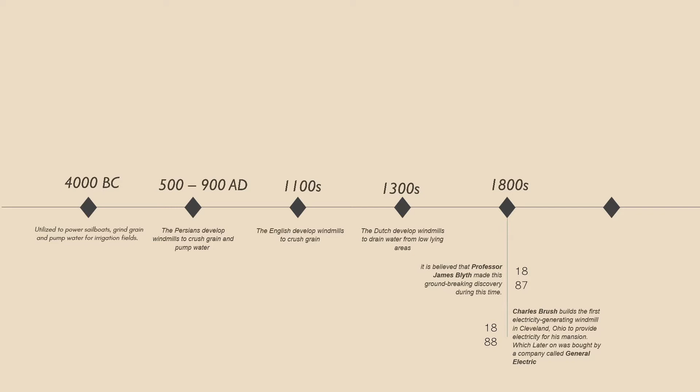Here comes the 1800s. During 1887, it is believed that Professor James Blyth made this groundbreaking discovery. After just one year, in 1888, Charles Brush built the first electricity generating windmill in Cleveland, Ohio, to provide electricity for his mansion, which later was bought by a company called General Electric.

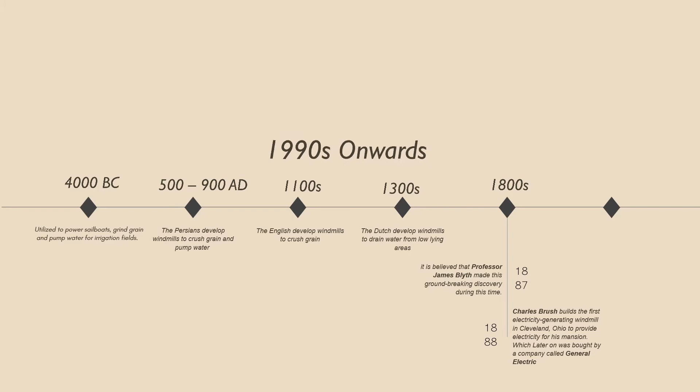In the 1990s and 2000s, the US federal government established incentives to use renewable energy sources in response to a renewed concern for the environment. Ever since, wind energy has been utilized mainly to generate electricity with the use of wind turbines, and the demand has been growing due to the decrease of supply in fossil fuels and its increase in price.

Wind power is one of the world's fastest growing energy sources. As of the end of 2017, the world's total wind energy capacity had climbed to 539 gigawatts, thanks to new installations around the world. If you would rank countries with the highest wind power capacity, China is the world's number one with a whopping wind power capacity of 188 gigawatts.

The United States comes second with a capacity of 89 gigawatts. Germany, India, and Spain follow this list.

Despite the fact that wind is free and renewable, it has its own disadvantages. The first disadvantage is that current wind turbines are expensive and they generate power only when the wind blows, making their output inherently unreliable. Furthermore, wind turbines must be located where the wind blows, which can be far from traditional power systems, necessitating the construction of new high voltage power lines.

Nonetheless, wind turbines are likely to play an ever-increasing role in global energy supply soon.

Now, let's go ahead and talk about wind turbine types. Wind turbine types are categorized according to the orientation of their axis of rotation. These types are horizontal axis turbines and vertical axis turbines.

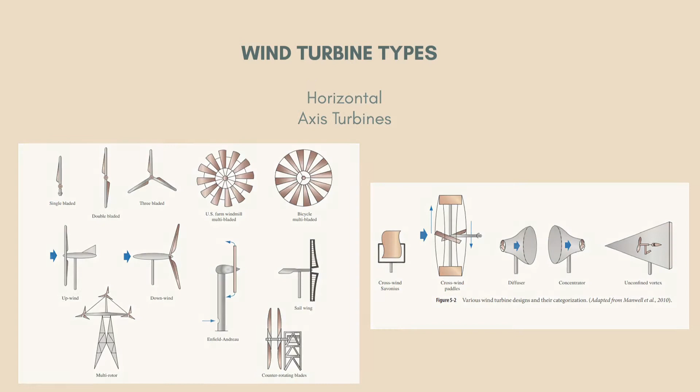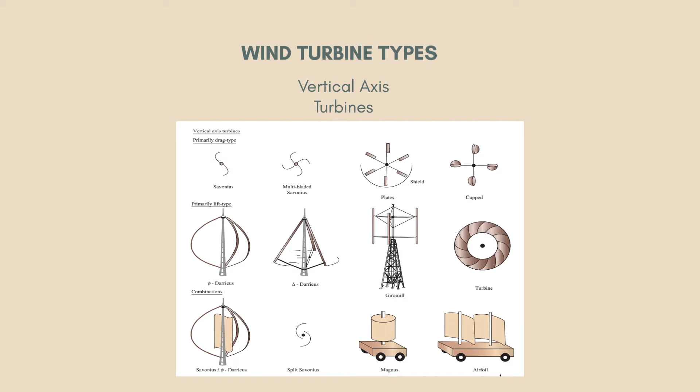For vertical axis turbines, it consists of four different main designs. These four designs are primarily drag type, primarily lift type, combinations, and others.

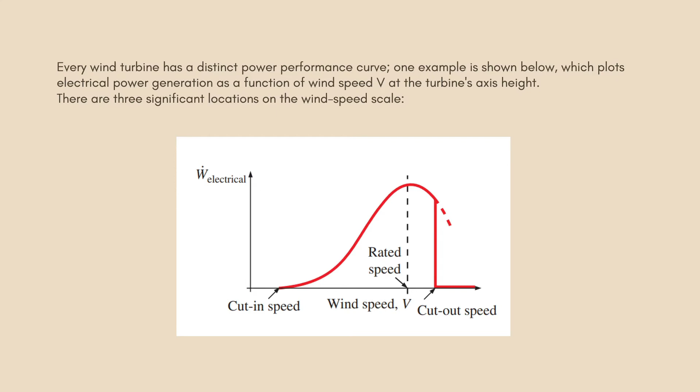Every wind turbine has a distinct power performance curve. One example is shown below, which plots electrical power generation as a function of wind speed V at the turbine's axis height. There are three significant locations on the wind speed scale.

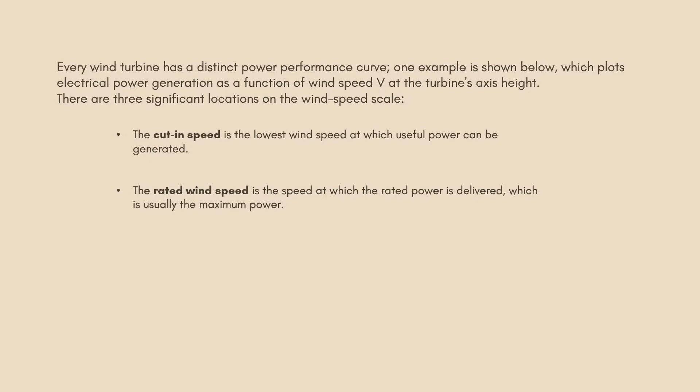First, the cut-in speed is the lowest speed at which useful power can be generated. The rated wind speed is the speed at which the rated power is delivered, which is usually the maximum power. The cutout speed is the maximum wind speed at which a wind turbine is designed to produce power.

At wind speeds greater than the cutout speed, the turbine blades are stopped by some type of braking system to avoid damage and for safety reasons.

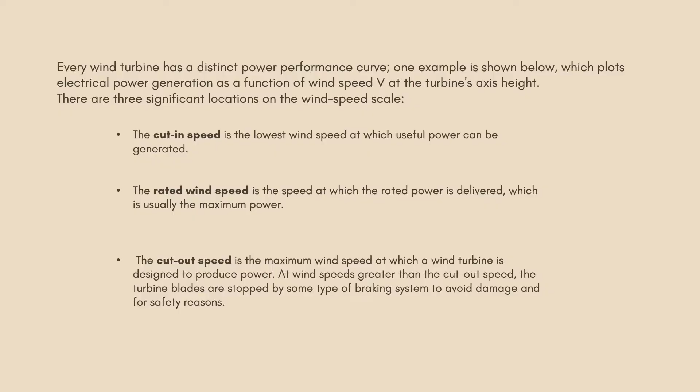Wind turbine efficiency: an actual wind turbine can convert only a percentage of available power potential into actual shaft power, and this percentage is called the wind turbine efficiency.

This is determined from the formula: wind turbine efficiency equals shaft power over available power.

The available power can also be expressed as the wind power potential formula, where it is one-half times density times wind area, times the cube of wind velocity.

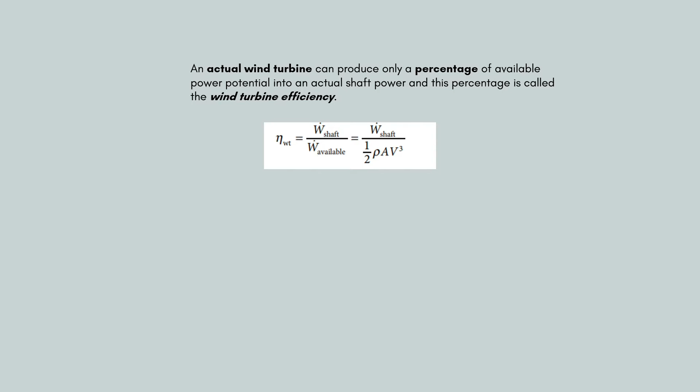Next, we can solve the electrical power output using the formula: electrical power equals gearbox or generator efficiency multiplied by shaft power. Here, the shaft power refers to rotor shaft power output.

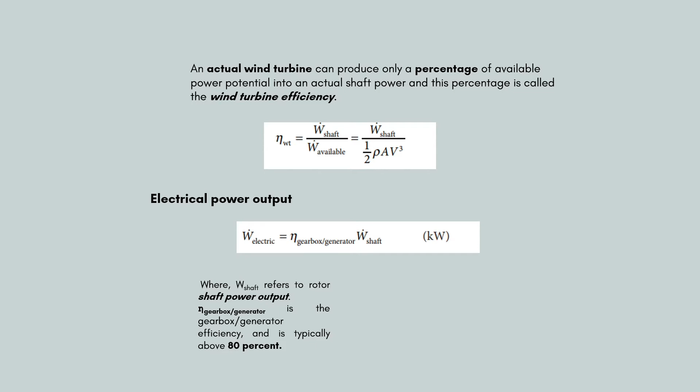A gearbox or generator connected to the turbine converts shaft power into electrical power output. The gearbox or generator efficiency typically has an efficiency of 80% or above.

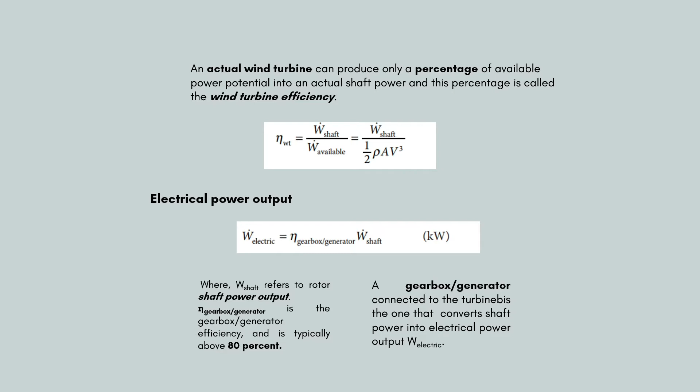Overall wind turbine efficiency can also be defined as the electrical power output divided by the available wind power, expressed in this formula. Note that a given wind turbine efficiency sometimes refers to overall wind turbine efficiency.

The overall wind turbine efficiency is related to wind turbine efficiency by this formula: overall wind turbine efficiency equals wind turbine efficiency multiplied by gearbox or generator efficiency.

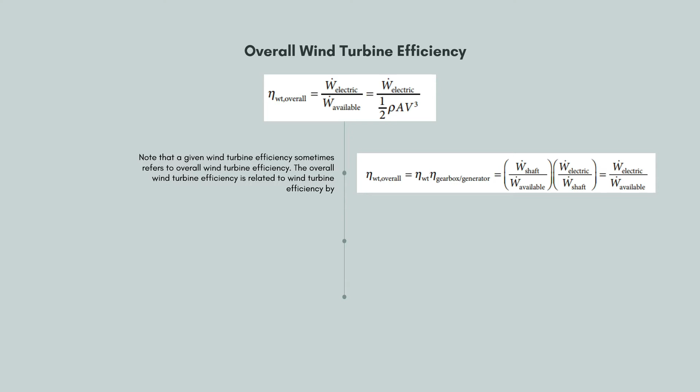Wind turbine efficiency equals shaft power over available power, and gearbox or generator efficiency comes from the equation of electrical power output. If we rearrange them, we get electric power over shaft power. We cancel the shaft power term and get electric power over available power.

The efficiency of a wind turbine is usually referred to as the power coefficient, or C sub P. Using the formula of wind turbine efficiency, we can get the actual shaft power output from a wind turbine as shaft power equals 1/2 times the wind turbine efficiency times density times wind area times the cube of wind velocity. The efficiency of wind turbines usually ranges between 30 and 40%.

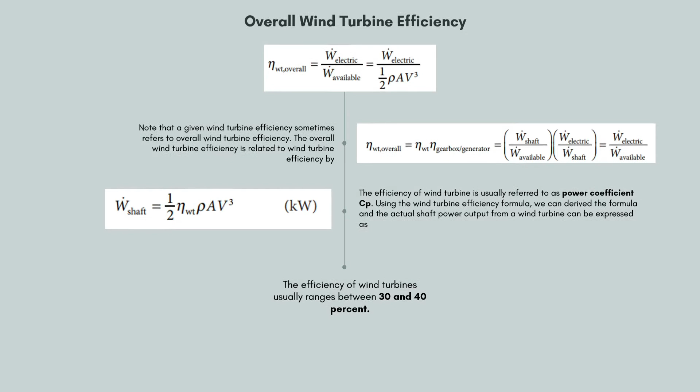The equation is: mv sub 1 squared over 2 equals shaft power plus mv sub 2 squared over 2. And the wind turbine efficiency equals shaft power over mv sub 1 squared over 2.

Combining the two equations above yields mv sub 2 squared over 2 equals mv sub 1 squared over 2 times 1 minus the wind turbine efficiency. For the exit velocity, the formula is v sub 2 equals v sub 1 times the square root of 1 minus the wind turbine efficiency.

This relation enables us to determine the exit velocity when the turbine efficiency is known and frictional effects are neglected.

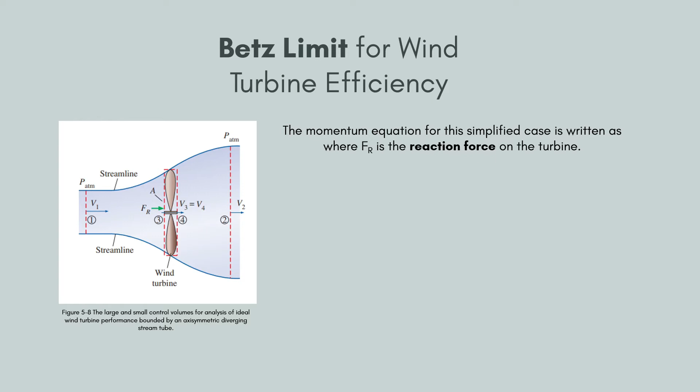We approximate the velocities at inlet 1 and outlet 2 to be uniform at V sub 1 and V sub 2 respectively, and the momentum flux correction factors to be unity. Then the momentum equation for this simplified case can be written as F sub r equals m times (V sub 2 minus V sub 1), where F sub r is the reaction force on the turbine.

The smaller control volume in the figure encloses the turbine. Since we approximate the turbine as a disk, the control volume is thin in the limit, thus A sub 3 equals A sub 4 equals A. Since the air is considered incompressible, V sub 3 equals V sub 4. However, the wind turbine extracts energy from the air, causing a pressure drop, so P sub 3 is not equal to P sub 4.

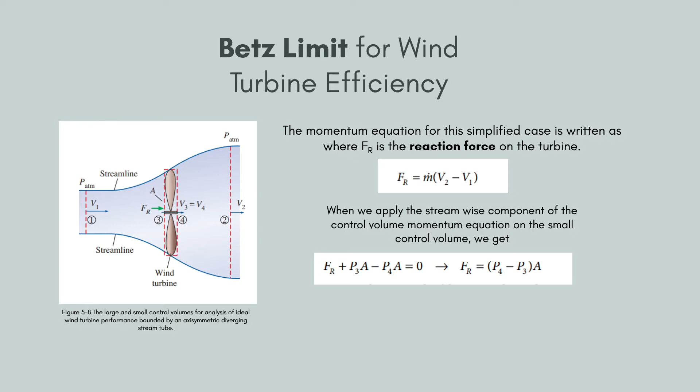When we apply the streamwise component of the control volume momentum equation on the small control volume, we get F sub r plus P sub 3 times A minus P sub 4 times A equals 0. Rearranging, F sub r equals (P sub 4 minus P sub 3) times A. Since it is extracting energy from the air, the Bernoulli equation is certainly not applicable across the turbine. However, it is a reasonable approximation between locations 1 and 3, and between locations 4 and 2.

In this ideal analysis, the pressure starts at atmospheric pressure far upstream, P sub 1 equals P atmospheric, rises smoothly to P sub 3, drops suddenly from P sub 3 to P sub 4 across the turbine disk, and then rises smoothly from P sub 4 to P sub 2, ending at atmospheric pressure far downstream, where P sub 2 equals P atmospheric.

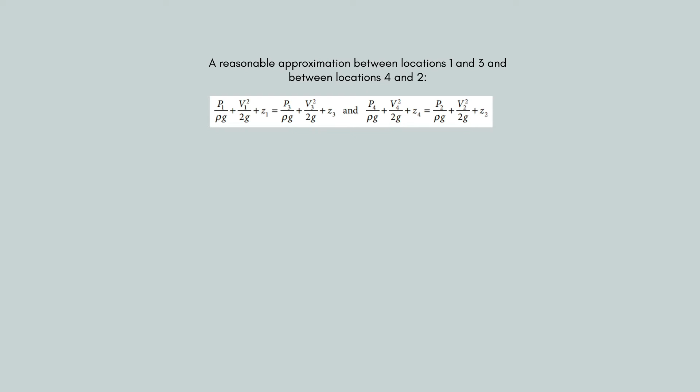We add the two equations setting P sub 1 equals P sub 2 equals P atmospheric, and V sub 3 equals V sub 4. In addition, since the wind turbine is horizontally inclined, Z sub 1 equals Z sub 2 equals Z sub 3 equals Z sub 4, or the gravitational effects are negligible in air anyway. After some algebra, this yields V sub 1 squared minus V sub 2 squared over 2 equals P sub 3 minus P sub 4 over the density.

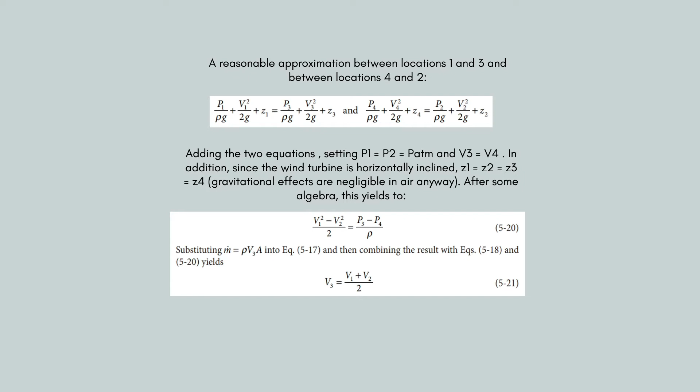Substituting M equals density times V sub 3 times A into the equation above, and combining the result with the equation, yields V sub 3 equals V sub 1 plus V sub 2 over 2. Thus, we conclude that the average velocity of the air through an ideal wind turbine is the arithmetic average of the far upstream and far downstream velocities. Of course, the validity of this result is limited by the applicability of the Bernoulli equation.

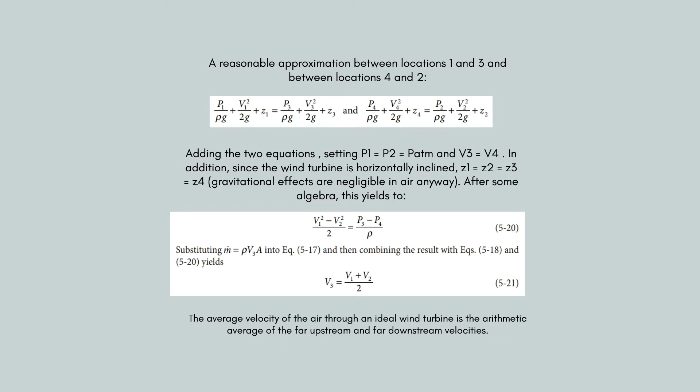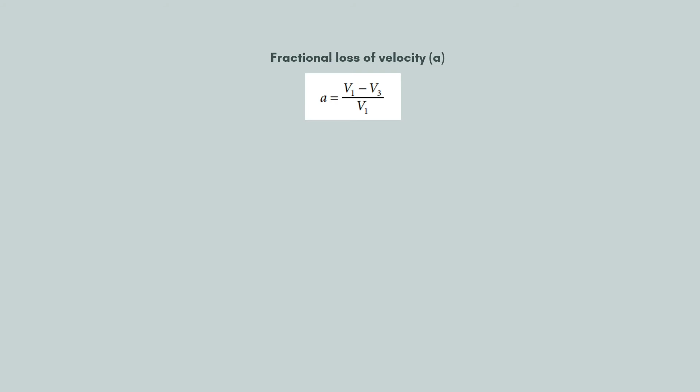For convenience, we define a new variable A as the fractional loss of velocity from far upstream to the turbine disk: A equals V sub 1 minus V sub 3 over V sub 1. The velocity through the turbine thus becomes V sub 3 equals V sub 1 times 1 minus A, and the mass flow rate through the turbine becomes M equals density times V sub 3 times A, which equals density times A times V sub 1 times 1 minus A. Combining this expression for V sub 3 with the equation, we get V sub 2 equals V sub 1 times 1 minus 2A.

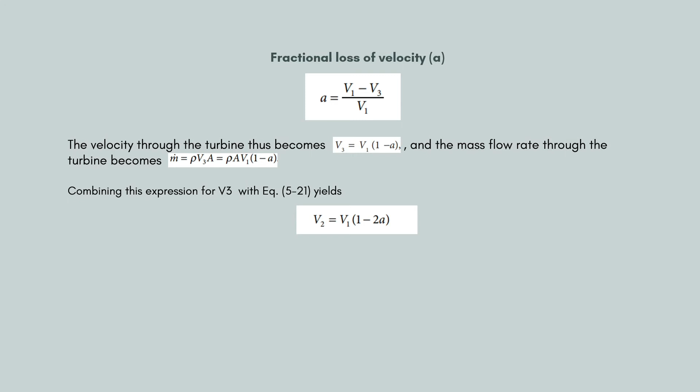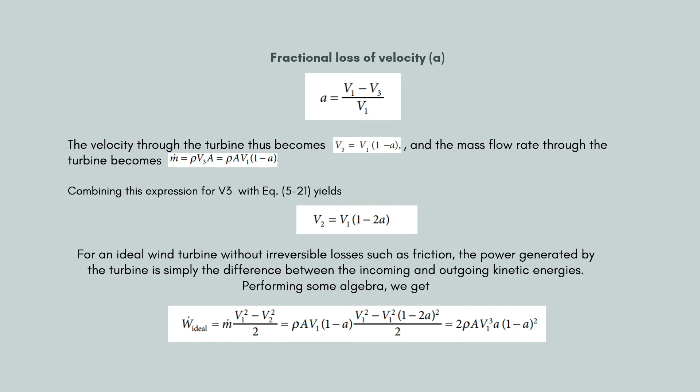For an ideal wind turbine without irreversible losses such as friction, the power generated by the turbine is simply the difference between the incoming and outgoing kinetic energies. Performing some algebra, we get: ideal power equals M times V sub 1 squared minus V sub 2 squared over 2, which equals density times A times V sub 1 times 1 minus A times V sub 1 squared minus V sub 1 squared times 1 minus 2A squared, all over 2, which equals 2 times density times A times V sub 1 cubed times the fractional loss of velocity times 1 minus the fractional loss of velocity, squared.

Assuming no irreversible losses again, and transferring power from the turbine to the turbine shaft, the efficiency of the wind turbine is expressed as: wind turbine efficiency equals shaft power over one-half times density times V sub 1 cubed times area, equals ideal power over one-half times density times V sub 1 cubed times area, equals 2 times density times area times V sub 1 cubed times the fractional loss of velocity times 1 minus A, or the fractional loss of velocity, squared, all over one-half times density times V sub 1 cubed times area, equals 4 times the fractional loss of velocity multiplied by 1 minus the fractional loss of velocity, squared.

Since the fractional loss of velocity equal to 1 is the trivial case with no power generated, we conclude that the fractional loss of velocity must equal 1/3 for maximum possible power coefficient. Substituting the value of 1/3 into the equation, we get that the maximum wind turbine efficiency equals 0.5926. This value represents the maximum possible efficiency of any wind turbine, and it's known as the Betz limit.

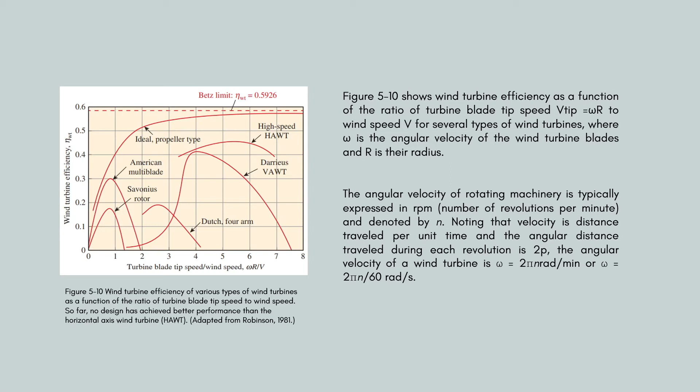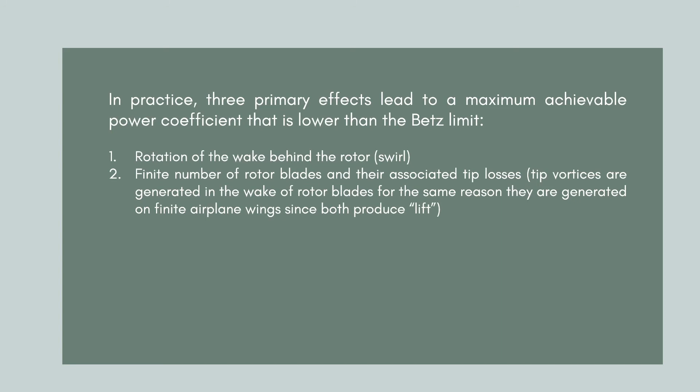In practice, three primary effects lead to a maximum achievable power coefficient that is lower than the Betz limit: rotation of the wake behind the rotor, or swirl; finite number of rotor blades and their associated tip losses, since tip vortices are generated in the wake of rotor blades for the same reason they are generated on finite airplane wings, as both produce lift; and non-zero aerodynamic drag on the rotor blades, including both frictional drag and induced drag.

In addition, mechanical losses due to shaft friction lead to even lower maximum achievable power coefficients. Other mechanical and electrical losses in the gearbox or the generator, etc., also reduce the overall wind turbine efficiency.

As seen in the figure, the best wind turbine is the high-speed HAWT, and that is why you see this type of wind turbine being installed throughout the world.

In summary, wind turbines provide a green alternative to fossil fuels, and as the price of fossil fuels rises, wind turbines will become more commonplace.

Considerations in wind power applications: when a wind turbine project is underway on a windy site, many turbines are installed, and such sites are popularly called a wind farm or a wind park.

Because of reduced site development cost, simplified transmission lines, and centralized access for operation and maintenance, the use of a wind farm is highly desirable.

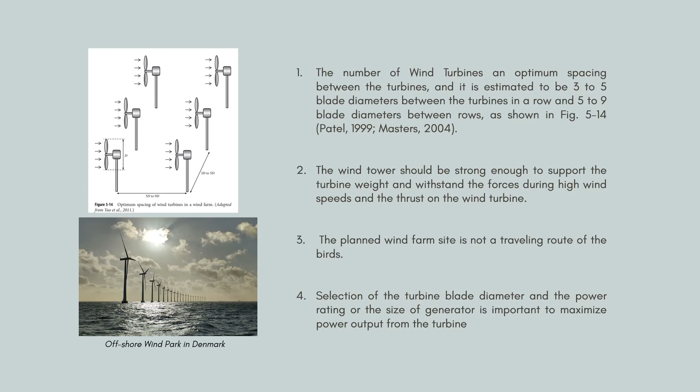A reliable power grid or transmission network near the site, along with good grid stability, is required for effective wind power generation. The wind turbine produces power at 400 volts, which is then stepped up to 11 to 110 kilovolts.

Poor grid stability may result in a 10% to 20% loss of power. Some wind turbines in China are not connected to the grid, mainly due to stability issues.

Wind turbine load factors typically range between 25 and 30%. That is, a wind turbine generates 25 to 30% of its rated power on average.

The strength varies according to the time of day. For example, in the early morning hours, power output is 80% of average power, while in the afternoon, power output is 120% of average power. Longer towers can help to reduce such fluctuations.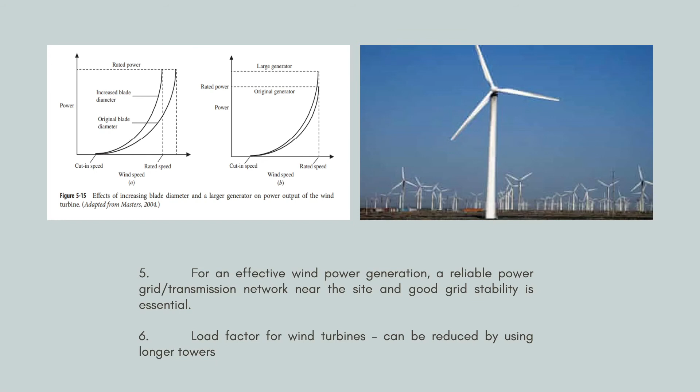An important reason for using tall wind towers is the wind speed increases with tower height, and higher wind velocities translate into higher power outputs. The wind speed can be expressed as a function of tower height and the roughness of the Earth's surface: V = V0 * (H/H0)^α, where V is the wind speed at height H, V0 is the nominal wind speed at height H0, and α is the friction coefficient of the ground.

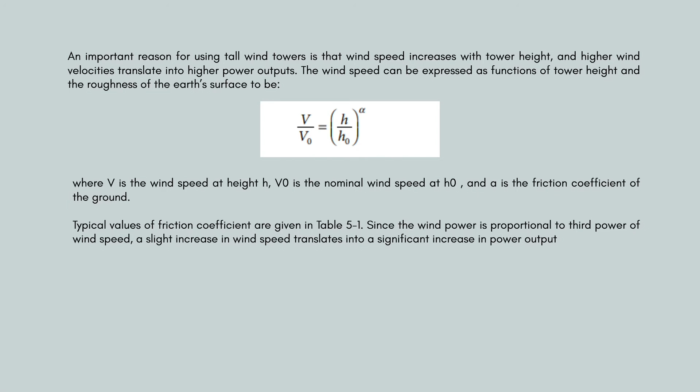Typical values of friction coefficient are given in the table. Since wind power is proportional to the third power of wind speed, a slight increase in wind speed translates into a significant increase in power output.

There is sometimes no connection to the electrical grid in the most remote parts of the world. Isolated power systems can be used in such places. Diesel engine power plants are commonly used for such autonomous power systems because diesel systems can be put into operation quickly and the units are small in comparison to other fossil fuel-based systems such as gas turbines and steam turbines.

A hybrid power system consisting of a diesel system and a wind turbine system can be operated together to minimize diesel fuel consumption. In this operation, wind power should have priority in meeting the electrical needs of users, and the diesel engines should be operated to meet demand when wind power is not sufficient. A hybrid system for an autonomous power system can also integrate a diesel system with one or more other renewable energy systems such as wind, photovoltaic, or hydropower.

The first wind turbine for electricity generation was developed at the end of the 19th century. Two important technological developments took place after 1940: the introduction of three-blade structure and the replacement of DC generators with AC generators. These were important in promoting the development of wind turbines.

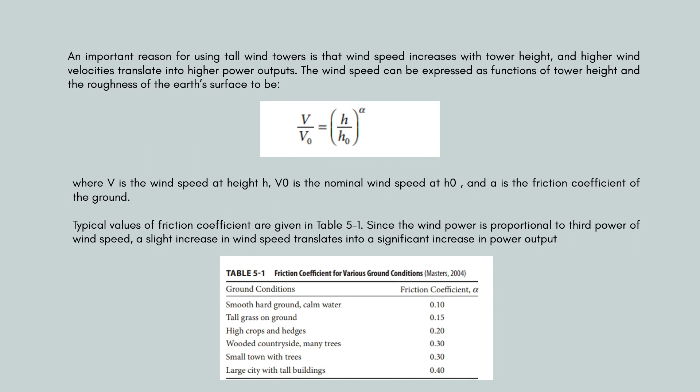Wind turbine technology has advanced significantly over the years, but there is still room for advancement that will allow for greater adoption of this environmentally friendly method of power generation. Some of the challenges in wind power technology are increasing the size of the wind turbine, designing turbines specifically for a given site, developing new structural dynamic concepts, developing custom generators and power electronics, improving manufacturing technology, and better control strategy.

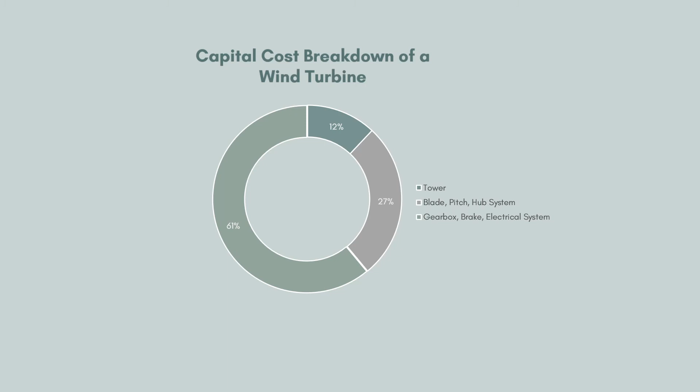The breakdown of capital cost of a wind turbine is given in the figure. The largest cost is due to gearbox, brake, and electrical system, with a contribution of 61%. Pitch, hub, and blade account for 27% of total capital cost. This is followed by the tower system with 12%.

There are other costs associated with turbine applications involving land, licensing, property tax, insurance, and labor, as well as operating and maintenance expenses.

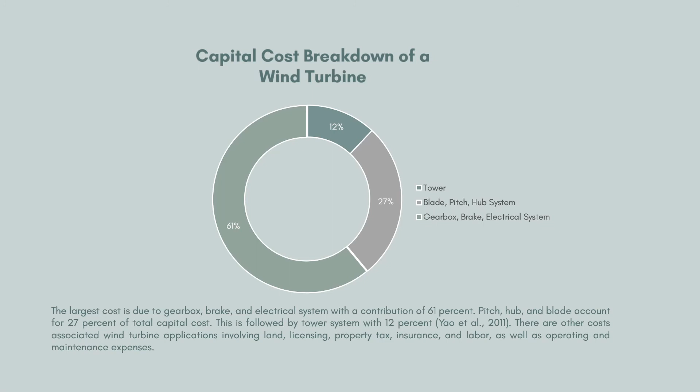Wind power potential: with the use of ideal turbines, we can directly and completely convert mechanical energy into mechanical work. The formula for mechanical energy is mechanical energy equals the mass flow rate multiplied by the sum of flow energy, kinetic energy, and potential energy. However, the inlet and outlet of a wind turbine are both equal to atmospheric pressure and the elevation does not change. This results in a constant flow energy and potential energy. Therefore, we can safely remove the flow energy and potential energy from the formula.

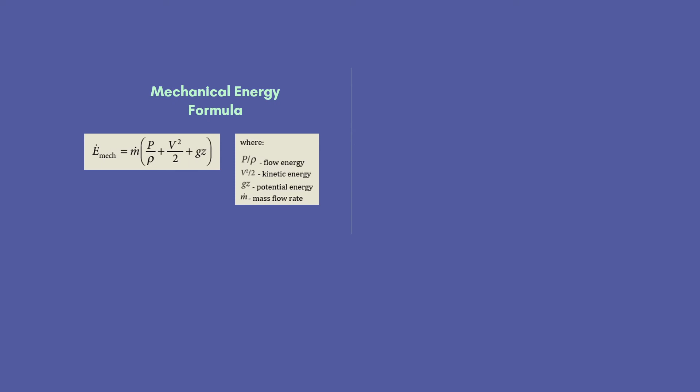We are left with the available wind power, expressed as: available wind power equals one half m v squared, in units of kilowatts. This is equivalent to the maximum power at a given velocity v. The mass flow rate is expressed as m equals rho A v, in units of kilograms per second, where rho is the density and A is the circular area of the blades.

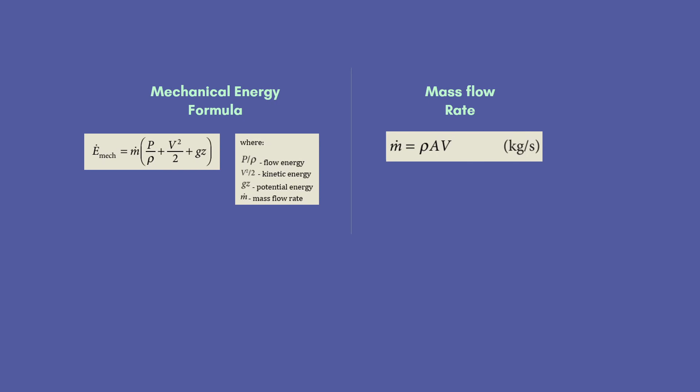Substituting, we get the available wind power equals one half rho A v cubed, which is the formula for wind power potential. According to this formula, the power potential of a wind turbine is proportional to the cubic power of the wind velocity. Therefore, doubling the wind velocity will increase the power potential by a factor of 8.

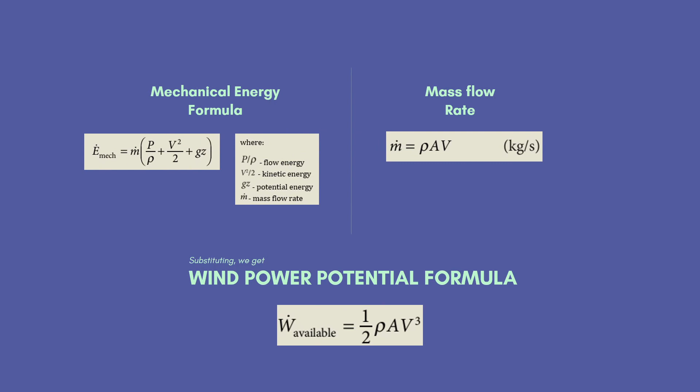Let us prove this. Say that in a given location, the wind has a density of 1.2 kilograms per cubic meter at a velocity of 4 meters per second. If a wind turbine has a diameter of 1.03 meters, the maximum power it can generate can be determined using the available wind power formula. Substituting, we arrive at the equation below, which equals 32 kilowatts.

After that, if you were to double the wind velocity from 4 to 8, we'll get 256 kilowatts. But why is this important?

This is because one cannot simply put a wind turbine in the middle of nowhere without considering this power relation. Well, obviously, for practicality, the location must have a steady wind velocity of at least 5 meters per second.

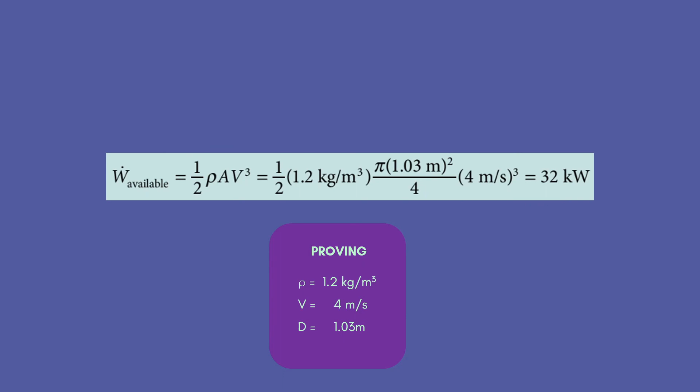But unfortunately, it does not end with just knowing the wind velocity at a given location. We must also consider factors such as blade diameter and the surrounding temperature during operation. The power potential is proportional to the density of air. Cold air has a higher wind power potential than warm air.

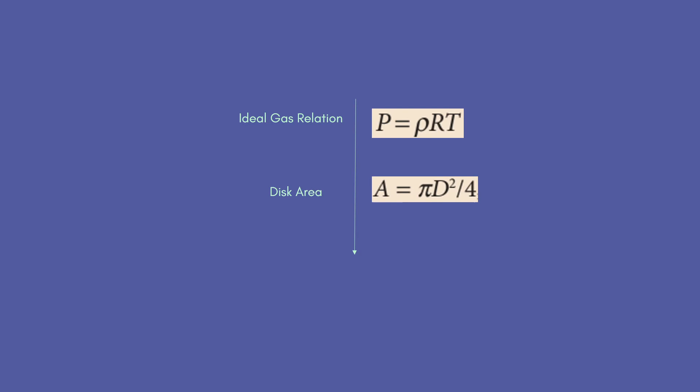Substituting the ideal gas relation, which is P equals rho RT, and the disk area equal to A equals pi d squared over 4, we substitute that into the original equation and we get the available wind power equals pi over 8 multiplied by d squared v cubed all over RT.

This states that the power potential is proportional to the square of the blade diameter. So therefore, doubling the diameter of the blade increases the power potential by a factor of 4.

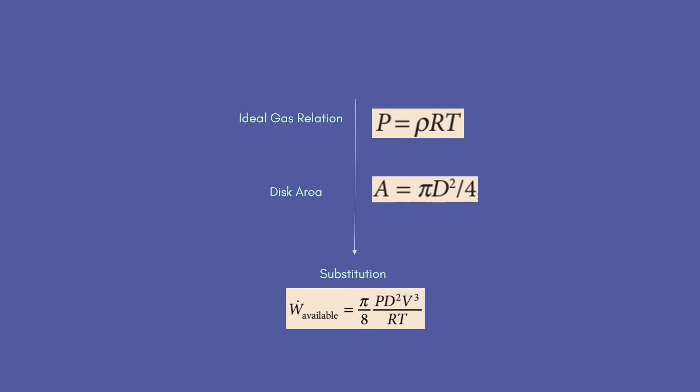Let us solve a problem. A wind turbine with a blade diameter of 90 feet is to be installed in a location where average wind velocity equals 20 feet per second. The average temperature and pressure of ambient air in this location are 75 degrees Fahrenheit and 14.5 psia, respectively. Determine the wind power potential.

Now, since we're given the gas constant of air, we can directly substitute it. By making use of the ideal gas relation, we get the equation rho equals P over RT, and upon substitution, we get the answer 0.07317 pound mass per cubic feet.

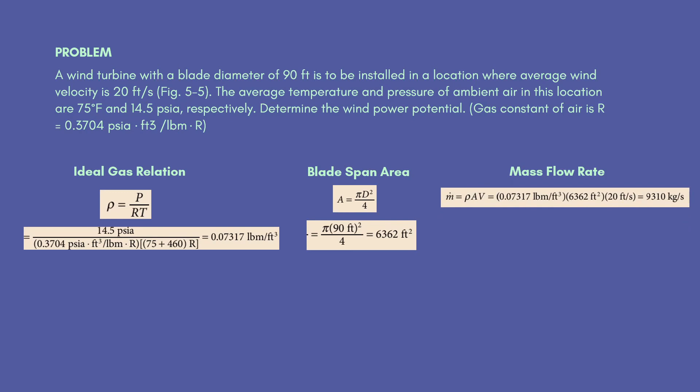The blade span area equals A equals pi d squared over 4, which gives us 6,362 square feet. The mass flow rate equals m equals rho A v, which gives us 9,310 kilograms per second. Now that we have all of this, we can solve for the wind power potential, which equals one half m v squared. Upon solving, we get 78.5 kilowatts.

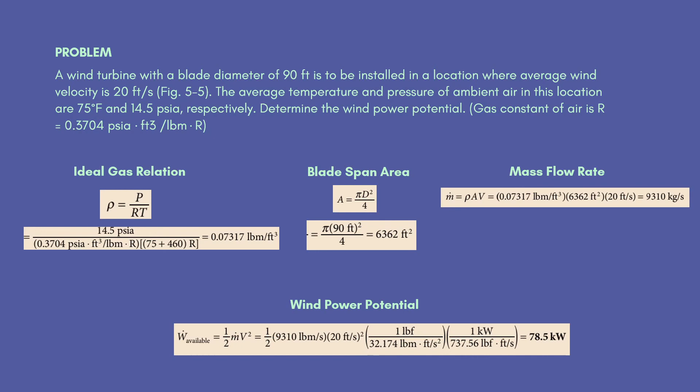However, we can directly solve for it using the formula pi over 8 equals pd squared v cubed all over RT. After substitution, we get 78.5 kilowatts, which is the same result as the earlier solution, a much simpler and shorter way to solve the problem.

Wind power density. For us to be able to compare two or more wind turbines and locations, it is important to consider available wind power per unit area, which we call the wind power density, or WPD. This can be expressed as WPD equals available wind power over A, which is also equal to one half rho V cubed.

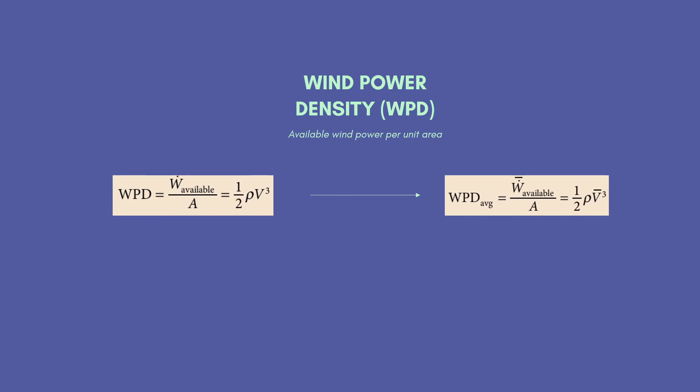However, this is an instantaneous formula. Wind speed greatly varies from time to time throughout the year. Because of this, it's logical to define the average power density based on hourly averages, expressed as the average WPD equals the average available wind power over A, which is also equal to one half rho of the average cubed velocity.

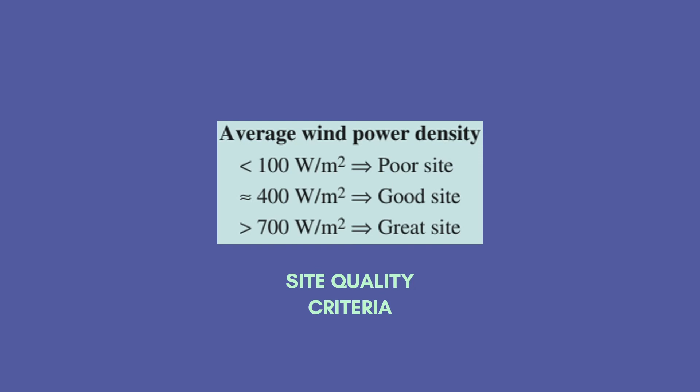Let us put that info in a real-life application. Here's an example. Consider two locations, A and B, with average wind power densities of 250 watts per square meter and 500 watts per square meter, respectively. Determine the average wind speed in each location. Take the density of air to be 1.18 kilograms per cubic meter. If a turbine with a diameter of 40 meters is to be installed in location A, and a turbine with a diameter of 20 meters is to be installed in location B, what is the ratio of wind power potentials in location A to location B?

If we solve for the wind velocity at the two locations, we get 7.51 meters per second for A and 9.46 meters per second for B. Since the blade span area is proportional to the square of the diameter, we will be using the square of the diameter for substitution in the final formula.

The wind power potential is proportional to the product of WPD and the square of the diameter. Making use of the WPD and blade span area formula, we get 2. From this, we can conclude that the wind power potential in location A is twice the power potential in location B.